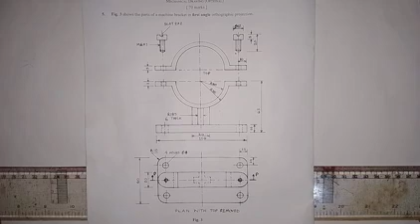This is an examination question, and it's a mechanical drawing. So let's read the instructions. As we have here, figure 3 shows the part of a machine bracket in first angle orthographic projection.

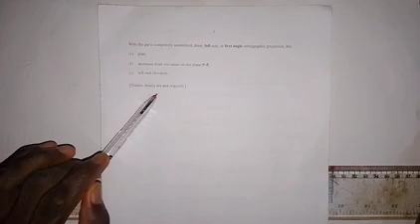Then on this page we have that, with the part completely assembled, draw full size in first angle orthographic projection. Question A is the plan, question B is the sectional front elevation on plane PP, and option C is left end elevation. And here we are instructed that hidden details are not required.

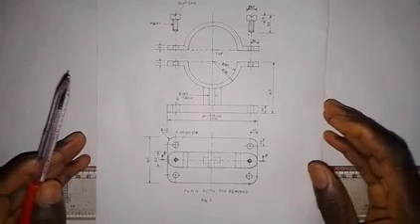All right, let me go back to the first page. So these are the parts as we have here. I'm going to start with the sectional view. That is question B. I will start with the sectional view, then I will move later to the plan and then the end elevation. So we are going to have 3 separate videos for this problem.

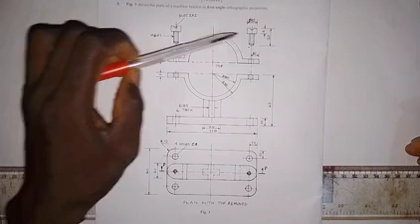Okay, so let's start with the sectional front elevation. So this is the front elevation and this is the plan. So we are to assemble this part. We are to insert this screw in here and this screw in here. Okay, and we bolt these two together, and then the cutting plane. So this is the cutting plane PP.

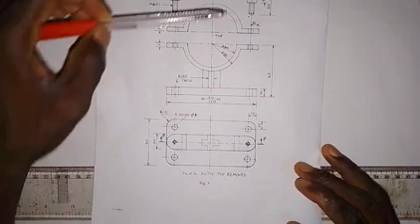So we are to cut after assembling. We are to cut down here. So what you have to do is to replicate what we have here. You're going to see how I'm going to do it right now. So we are going to start with the base. The length of this base, which is in the form of a rectangle, from here to here is 110. So first of all, make this rectangle.

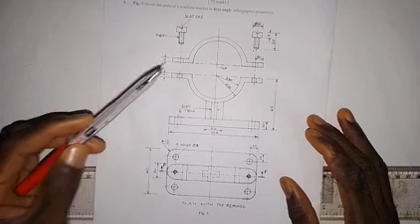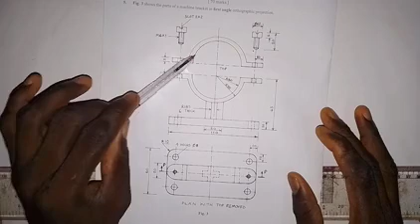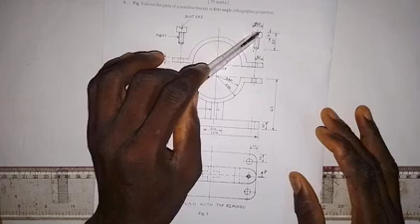And then for the screw that we have here, it is M6. That means the distance from here to here is 6 millimeters. And this part of the screw from here to here, the diameter is 12 millimeters, and from here to here is 5 millimeters, and the length of the whole screw, from this end down, is 20 millimeters. So you are going to see how I'm going to work this out.

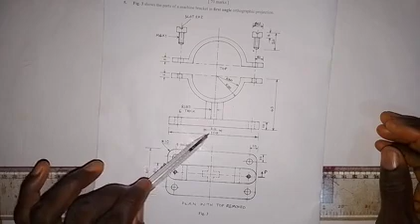And then we also have a rib. Though we are not going to draw this one, because in the front elevation sectional view it should not be there. Then to produce this one from here to here, we have to take a measurement of 20 millimeters. Okay, so let's go and see how this can be done. We are working on the sectional view of the front elevation first.

So let's start. The first thing we are going to do here is draw a horizontal line. And then I need to draw a vertical center line. So I will draw a vertical center line here like this. Then on this vertical center line, I'm going to take a measurement of 10 millimeters up for that base.

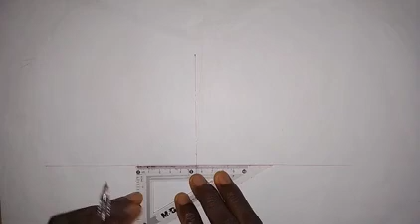And then I'm going to take a measurement of 55 millimeters to this side, out of 110. And I will take 55 from this point to this side, making 110. The next thing I will do is draw a horizontal line through this point, to this side and to this side. Having done that, I'm going to draw a vertical line here to complete this, and a vertical line here to complete this.

Having done that, the next thing I'm going to do is take a measurement from this point, 35 millimeters up. Sorry, 65 millimeters, not 35, 65 millimeters up. So I'm going to draw a horizontal line through this point, to this side and to this side.

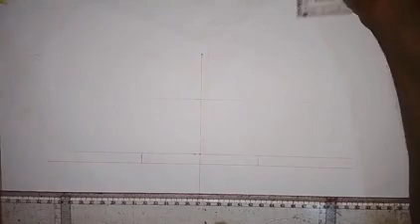Having done that, I will take a measurement of 5 millimeters down and 5 millimeters up. I'm going to draw a horizontal line from here to the left side and also to the right side. Okay, this is not showing well. Then for these 5 millimeters that we have taken up here, I will draw a horizontal line to the left and also to the right.

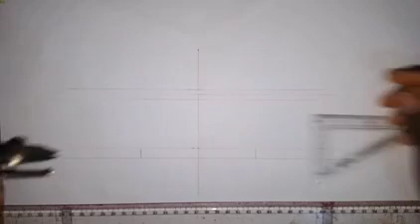Alright, the next thing I'm going to do is take a measurement of 30 millimeters for that inner semicircle, since the diagram told us the radius is 30. So for this semicircle here, the radius is 30. The radius is also 30 for this. So we put the main point here on this middle line, and at this point we draw a semicircle.

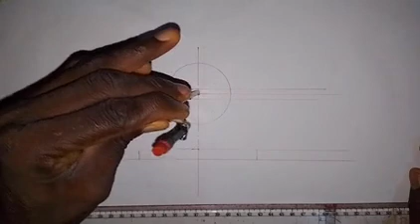Up here, okay, semicircle up here, and then we also take it down. So we take it down, just like a complete circle. Okay, so half for the lower one and half for the upper one.

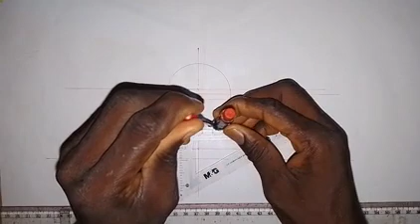Next, we take 35 millimeters for the second semicircle. So this is 35 millimeters here. We put it here at this point. For this one, it starts from this point and goes like this. Okay, then on this side we do the same thing.

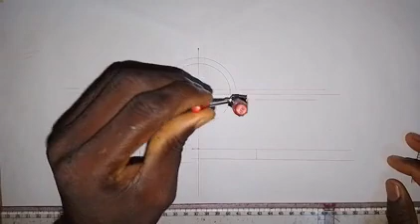All right, we have to take it easy. Okay, so this is what we have now. What I've done is for this part here and for this one. The next thing is that the length from here to here is also the same as this 110.

So what I'm going to do right now is take my set square. Coming to this point here, I will draw this line. This is where we have this 110, where it ends. So I will draw this line, and then I will come to this side also and draw this line. Okay, so we have it like this.

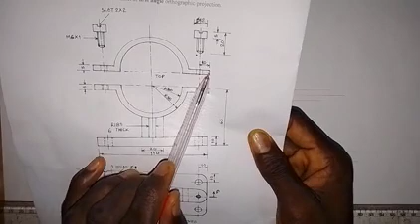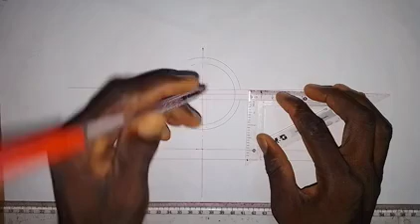Having done this, we need to provide a space for the set screw. To get the center line of the set screw, we have to take a measurement of 10 millimeters from here to here. So from this end, I'll take 10 millimeters inward. This is 10 millimeters. Then from this end, I will also take 10 millimeters inward.

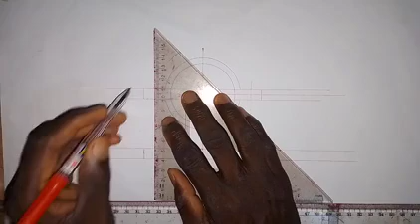Okay, so that's 110. Then I'm going to draw a center line here. So draw a center line; it goes like this. All right, then I'll come to this side also and draw a center line here.

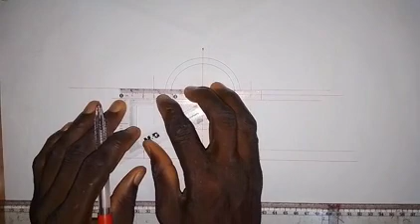Then for the set screw, as I said, it is M6, so the thickness is 6 millimeters. We are to draw that, so 6 divided by 2 gives us 3 millimeters. So we have to take a measurement of 3 millimeters. From here, I will take a measurement of 3 millimeters to this side.

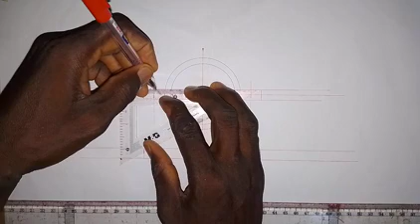This is 3: 1, 2, 3. So this is 3 millimeters to the left side, 1, 2, 3 to the right side. Coming to this side, I will do the same thing: taking 3 millimeters, 1, 2, 3, and then 1, 2, 3 to the right side, so 3 millimeters. So we have that now.

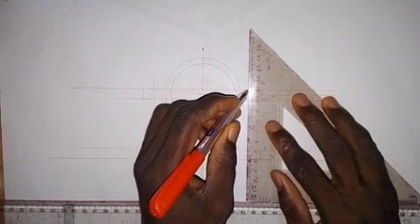Then from each of these points, I'm going to draw a vertical line. It comes down a bit like this, and here I will do the same thing; it comes down here a bit. Then we also do the same thing on this side: draw a vertical line down here, and here also a vertical line down. All right, so we have this now.

The length of the set screw is 20 millimeters, but before I do that, I need to produce the top part of the set screw with a slot. This slot has a width of 2 millimeters, so that's what we put here. First I need to take a measurement of 5 millimeters. From this point I will take 5 millimeters up, so this is 5 millimeters.

The diameter of the set screw is 12, so I will take a measurement of 6 millimeters. From this center line I will take 6 millimeters to the left side and 6 millimeters to the right side. Then coming here, I will also take 6 millimeters from the center to the left side and 6 millimeters to the right side. Okay, so we have this.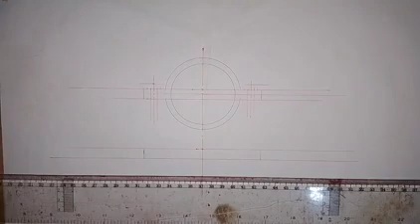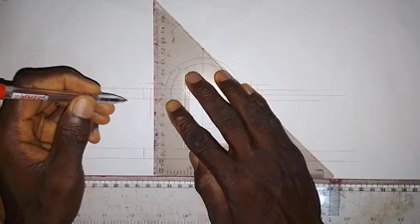What I'm going to do now is draw a horizontal line here at this 5 millimeters, then transfer it here. Then with my set square, I'm going to draw a vertical line here to complete this, do the same thing here like this, and then coming to this side I will do the same thing, and here also.

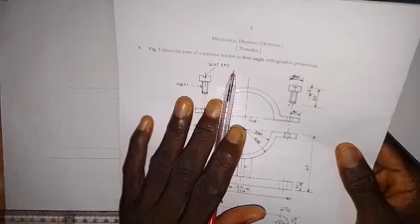All right, so having done that, the next thing I'm going to do is create the slot. The width of the slot from here to here is 2 millimeters, and the depth of the slot is also 2 millimeters. That's why we have slot 2 by 2. So what we are going to do now is take 2 millimeters down from this top, so this is 2 millimeters here.

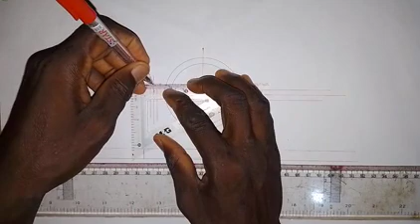Okay, so here I will draw a horizontal line, just a short horizontal line, and do the same thing here. So I've taken the measurement on this side, then I'm going to come to the center here. I will take 1 millimeter to this side here, and 1 millimeter here. All right, so it's going to be a small space, so this is 1 millimeter here, and this is also 1 millimeter.

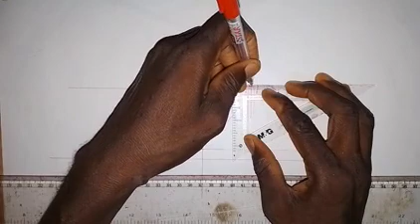All right, so I'll get it done at once by making it a thick line. I use my black pen for that. All right, so I've created the slot. It may not be really visible, but it's already created. So we have this now.

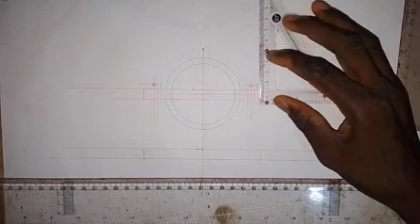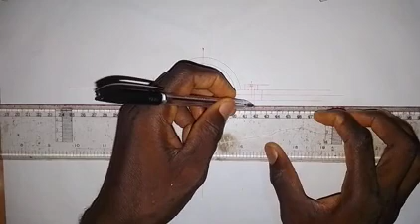So then the length of the set screw is 20 millimeters from the top here, so I will take 20 millimeters down, so this is 20 millimeters. All right, so I'm going to terminate it here. All right, so I have this now. Then there's something I need to do here, so it should be 1 millimeter, so I'll just take it down like this.

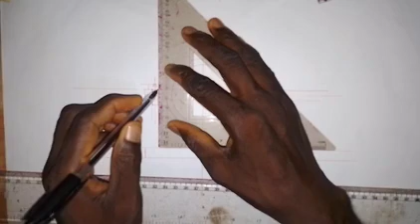Okay, so I've done this one. I'll pause the video to do the other one.

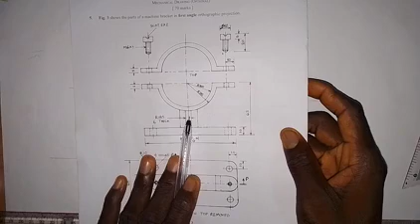So what I have left here is to make the rib. The part that we are making for the rib is this part here and this part here. This will not be there, because they have been cut off. As you can see here in the plan, this one is cut off, so we can only see these two parts here and here.

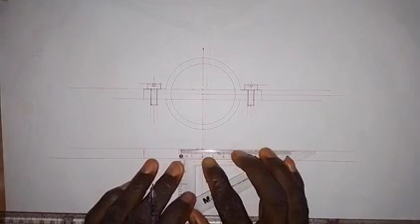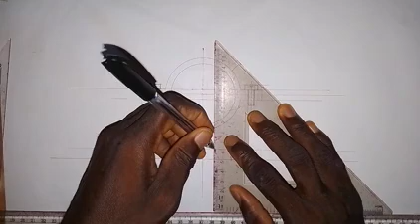So as we have here, from here to here is 20 millimeters, so from the center here we take a measurement of 10 millimeters to the left side and 10 millimeters to the right side. Then I'm going to draw a vertical line, and I make it a thick line at once, like this. Then we also come here, draw and make it a thick line at once. Okay, so we have this.

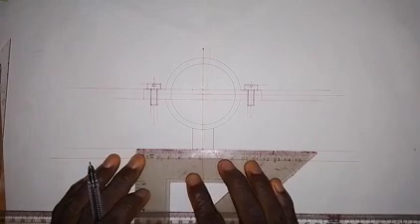Now for the rib, we are not going to hatch it. So what we have left to do here now is make this line a thick line, so we have a complete rectangle here. And then we make this line also a thick line.

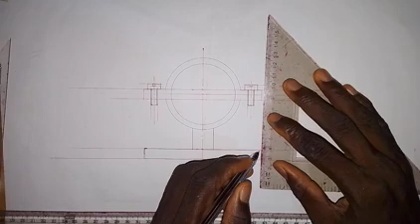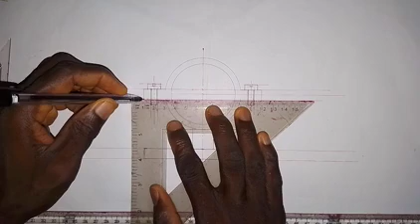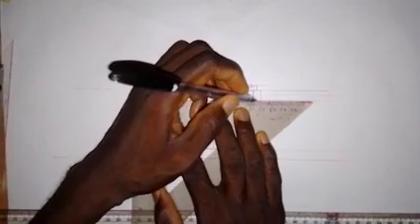All right, so other things that we have here: we need to make this line a thick line, so it goes to this end, from here to here, so it will not pass through the set screw. We also make this a thick line from here to here, and then we make this line a thick line. All right, so we have this.

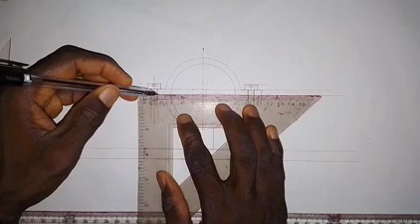Then coming here, this line will also be a thick line, from here to here, and we also make this a thick line. So what we are left with now is the hatching of the cut surface. I will do the hatching while I pause the video, and when I'm done I will come and explain some things.

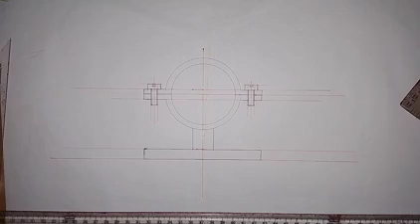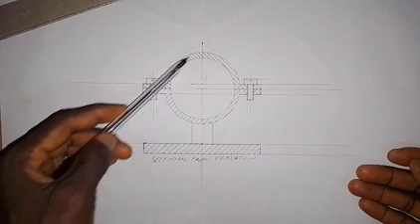All right, so here is the sectional front elevation. I hatched the base; we usually use the 45 degree set square. For this part, you can hatch it in the same direction as this, but this upper one, because there are two parts, you need to hatch in another direction. That is what I've done here. And you are not to hatch through the set screw, so you leave the set screw unhatched. So this is how the sectional front elevation will look.

And don't forget, at the bottom here, write sectional front elevation, because it's part of what may be required for marking, so you need to do that. So it's as simple as I've done it here.